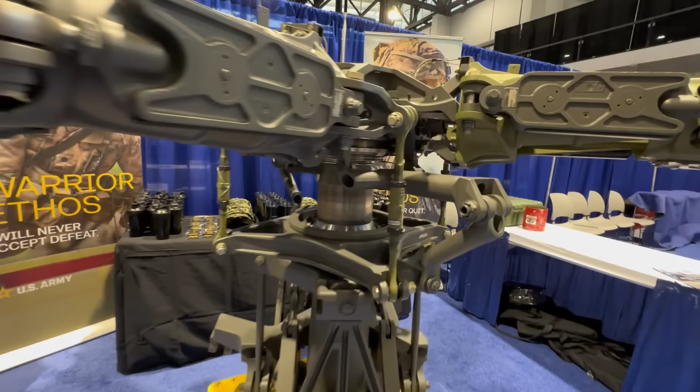First star of the show: the Helicopter Challenge. This event is presented by the United States Army, and this is called the Main Rotor Track and Balance Adjustment. The task simulates adjustment of the main rotor pitch change links of the helicopter main rotor track and balance. If I'm not mistaken, I believe this comes off of an Apache, so correct me if I'm wrong in the comments.

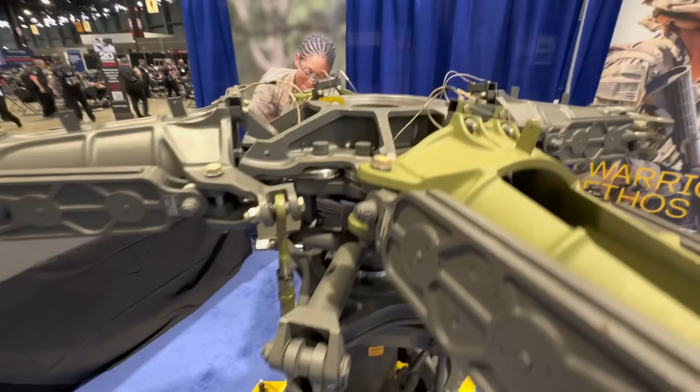Last time I actually worked on helicopters or any helicopter component was back in A&P school. Ever since then, I've never actually touched a helicopter in my career — I've always just done main jets. But I do still remember some small bits and pieces of information from my studies. Rotor track and balance is a process of smoothing vibration within the airframe, which are caused by the main rotor blades.

By adjusting the pitch of individual blades, you are able to cancel out that vibration throughout the helicopter fuselage, also giving a better performance to the blade's rotation.

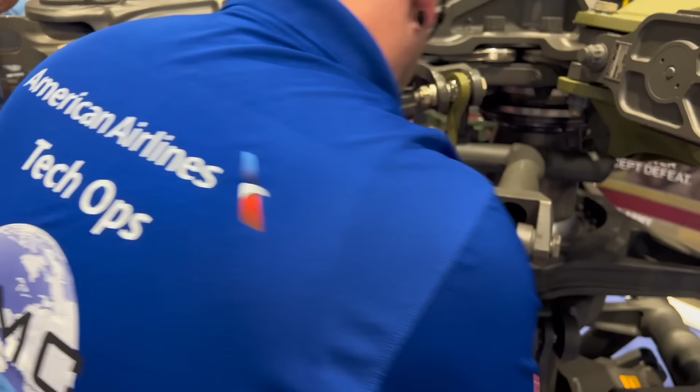Just to make mention, there are 27 events within this whole competition, and this is one of them. Some of them are individual events, as you can see one of my teammates performing this one, and some of them are more of a team combined event, such as more people involved, maybe 2 or 3.

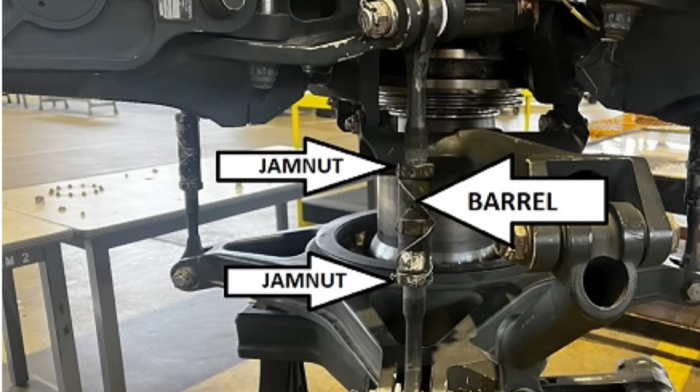My teammate is cutting away the lock wire, or safety wire, from the jam nuts in order to get them loosened to get the adjustment ready. As soon as he loosens the jam nuts, he can turn that center body, which is called the barrel. Depending on the type of adjustment needed, which is preconditioned and already told to us because there are manuals we are following, they will turn that barrel in a certain direction to get the certain adjustment they need. Once it's readjusted, it has to be re-safety wired, but this time by hand.

On a quick little side note, a big thank you to Charles, the big gentleman standing behind the man with the blue shirt. That man's name is Charles, and he was the judge in that competition and also a very good friend. He's actually an incredible individual. So if you see this, Charles, thank you, brother. You're incredible.

Engineers, technicians, students, ready, set, start.

You know, I just realized I have not broken down the actual series of events of the competition, so let me double back on myself and explain. The entirety of the event takes 4 days. Day number 1 is orientation. The next 2 days are the actual competition, and day number 4 is the award ceremony.

There are 27 events this year and 90 teams this year. Every team has 5 active members and 1 reserve, just in case somebody gets injured, you'll have a reserve personnel. Some of these events are individual events, meaning only 1 person performing the tasks, and some of them are team-based, such as 2 or 3 people.

Within the 2 days that the events are actually taking place, it is staggered out on a very particular time basis, so you have a break in between the events. But when the event is actually happening, everybody's participating, everybody's doing something. Each event gives you 15 minutes to accomplish the tasks.

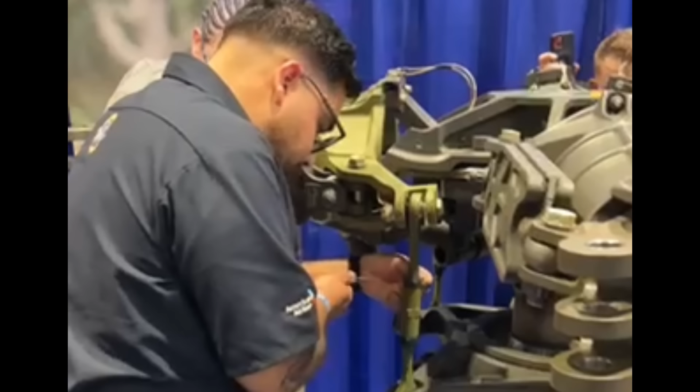Now, one thing I'm going to mention here is that this is a very unrealistic way of doing things. In the real world, nobody is taking liberties with time. Matter of fact, we do the complete opposite, we take our time. So to anybody watching, any future students or future aircraft technicians, this is not how to do it. This is a good example, a good understanding of how to interpret manuals, but speed is not the key here. But in the spirit of the competition, obviously this is how it's done. But my point here is that we don't go fast in the real world. You're going to hear me say that a lot during this video.

As you can see right here, this individual is safety wiring by hand. To make mention, that individual is actually part of the schools that we are sponsoring, West LA College, a phenomenal mechanic, and I can't wait to see them out in the field.

All right, on to the next event. This one is presented by United Airlines, and they brought out a portion of a 747 wing. This is a fuel tank entry event. The procedure is to defuel the aircraft wing, simulated obviously, and then deactivate the NGS system, the nitrogen generating system. Once that's completed through various switches and making sure proper lights come on, then you can take off the panel.

Same as before, rules apply. You have to follow the procedures, but you have to go as fast as possible. But once again, in the reality, in the real world, you're not doing this fast.

During these kind of events, communication is very important, especially between the two team members. One team member is reading instructions while the other performs the work, and it can also be vice versa.

After all the simulated safety precautions have been performed, now you can remove the panel.

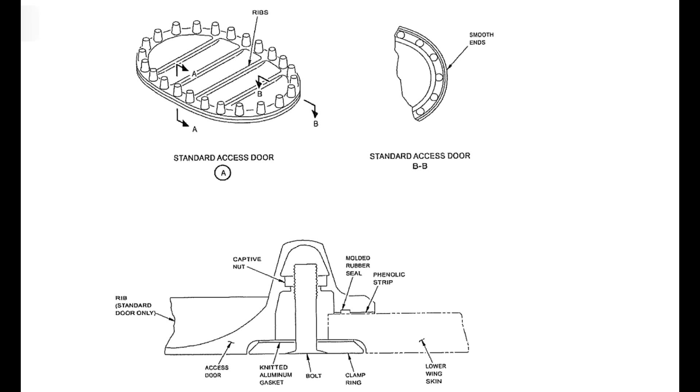Once all said and done, all tooling has to go back to its proper location. Yes, they will dock you points if you don't put the tools back in the proper location, or even if the torque wrench is not zeroed out. Very strict. Overall, very fun, but very laborious event.

On to the next one. This is really cool. This one was actually a brand new event, once again presented by United, and this was called Render Safe. This was a door slide change on a 767.

In order to perform this task, you have to really pay attention to the maintenance manual. There are a lot of safety precautions and lockouts just for this. I'm going to remind you again, in the real world, you do not do this fast. This task in the real world is actually very dangerous.

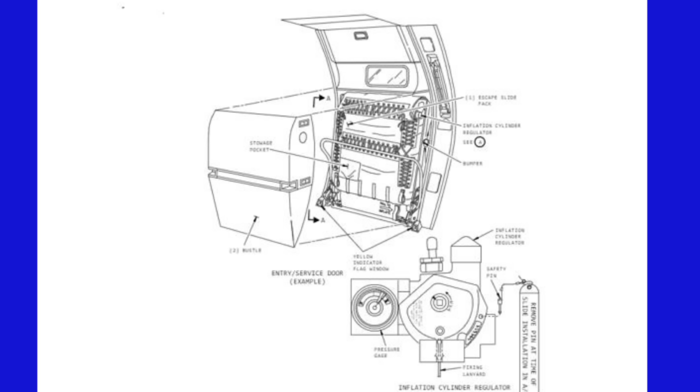One unique thing about the 767 door is that it doesn't swing out. It actually goes up into the fuselage. It's attached to a very massive spring that's in the overhead.

That's one of the lockout points, where you have to put a specific pin in there. Because when time comes for an emergency and the door is being deployed and the slide deployment is actually happening, that door goes up quick in a heartbeat.

The secondary point of security or safety is to actually pin the bottle, the actual bottle that inflates the slide itself, which is behind that bustle. Here's what the slide looks like behind the bustle.

The key component right there on the bottom is called the girt bar. That's what attaches the slide to the floor, and once that door moves up, the slide gets deployed because it gets pulled out. So as the door moves up, the slide stays in place and then unravels itself and gets inflated. You can see it right there.

The procedure here is, first of all, put out all the safety equipment, making sure that nobody operates the door from the inside or the outside. Second, make sure you're following the manual procedures, and then start locking out all those key components I was talking about earlier. This was a 3-person event.

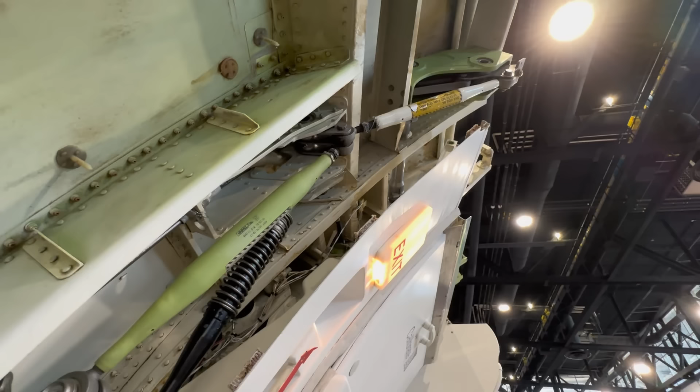One person was the inspector and two technicians were working. Communication and callbacks were imperative.

This is the upper roller guide, and this must be pinned before doing any kind of work. The slide comes with its own pin, and we must pin it right there, as you can see with a little yellow arrow.

This is a simulated event, so the bottle pressure is 0, but it's usually reading about 3,000 psi. This is why I said the job is actually very dangerous and has to go very slow. Inadvertent slide deployment can cause lots of damage and lots of injury.

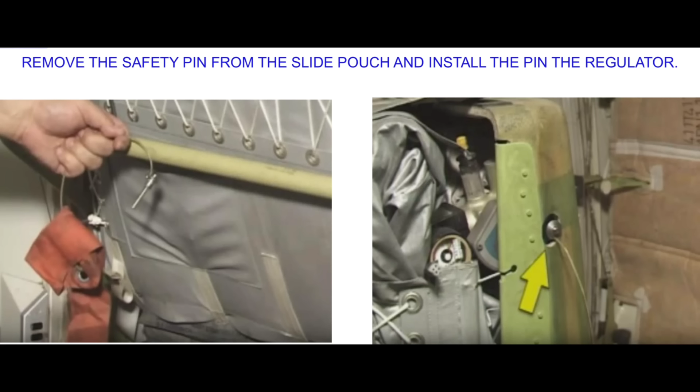Here's a wonderful example of the Baker students performing the duties. Once everything is properly disconnected, the slide kind of leans forward towards them, and then they simply replace it.

There are a bunch of steps that I'm leaving out of this one because it would take me another hour just to explain how to do this whole task, but I'm giving you the short version of this.

This was a very challenging event, and it was a brand new event, so it took us a minute to get used to it, but it was fun. We had a great time.

Okay, on to the next one. This is the click lock challenge. Click lock is a particular type of fastener, and it has a very special feature.

The feature is that it's self-locking. It no longer requires safety wire. As the fastener gets tightened to its proper location and comes down to its very last 2 turns, that's where the magic happens. The flexible beam fingers of the locking act against the detent cam. The mating part provides a prevailing torque which is sufficient to prevent any kind of loosening. Fancy way of saying it self-locks.

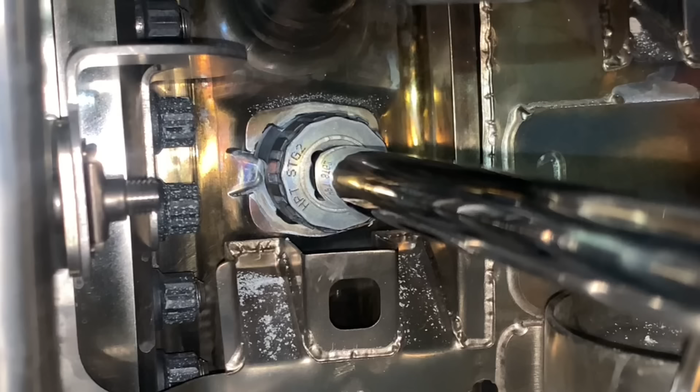It's the slogan of click lock, we won't back off. To loosen it, you just provide enough torque and it will loosen. But the technology is so advanced that vibration is not going to affect it.

There's a variety of fasteners that they have, and the majority of the time they're using it on fuel line couplings, borescope plugs, drain plugs, pylon locks, things of such. Now you ask yourself, how come they don't use this kind of technology all over the aircraft? Well, it's very expensive. So using traditional fasteners with safety wire, yeah, that's still being done. These type of fasteners are more reserved for very crucial components, the ones I mentioned earlier.

It's a comparison. First, you have to torque down the click lock, and then you have to do it conventionally. The point here is to see the difference. I would install the fastener on the left, which has the click lock, and then I would do the fastener on the right that has no click lock and have to safety wire it.

It's a way where the company can represent its product and show how efficient it is and much quicker. I'm sorry I didn't get a chance to capture the footage of it, but I hope you guys got the gist of this. Up next, the DMC challenge.

DMC is a tooling company, and they are a staple within aviation, especially when it comes down to avionics works. In this particular event, the technician was tasked with repairing and securing a wiring harness.

DMC put out a really great example video. It's on YouTube. You guys can go check this out. Here's just a couple of small clips of it.

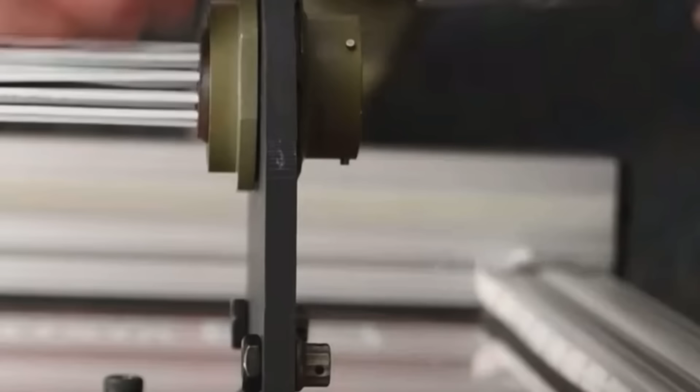Utilizing the special tooling provided, the technician can remove the wire from the cannon plug on both ends of the wire bundle.

Once that's done, any kind of FOD is discarded and you have to recreate a new wire. That means you have to repin it using, again, a special tool to crimp a new pin onto the wire.

The crimper itself has to be assembled because there are different settings on the crimper because of various amounts of gauge of wires and pins.

A new pin will be inserted, and so will the wire, and the crimping action takes place. Pretty simple. Avionics work is actually pretty fascinating when it comes to aviation. Lots of new technologies out there, and I highly encourage anybody that is up and coming into this field to learn more about it.

Once the new wire is assembled, now it gets reinserted using another specialized tool. A quick little tension check to make sure the pin is well seated within the cannon plug.

And onto the lacing of the wiring bundle itself. Now, DMC has produced a new tool called Lace Lock. This eliminates the traditional way of lacing up wiring bundles as well as zip ties, makes for a quicker and more cleaner look, as well as it's more secure.

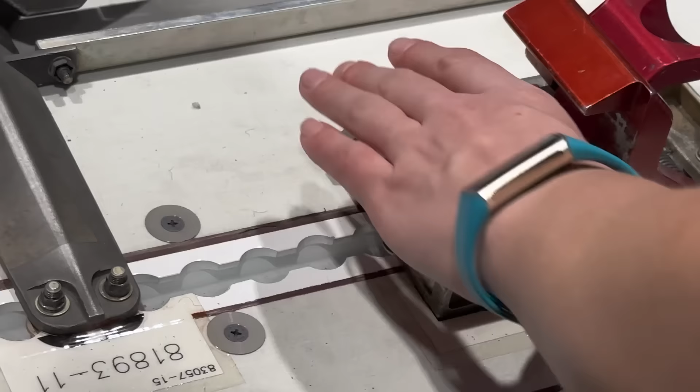This was represented by FedEx, and this was a cargo floor lock. These are the locks that hold down pallets within aircraft cargo holds. The task at hand is to remove, disassemble, inspect, repair, and reassemble.

Looks easy, sounds easy, but trust me, this was not an easy task. Check out the minute components that are within it and the articulation of these clips. It is very difficult to do this.

If not handled with proper care, it turns into a finger mousetrap, basically. It'll snap your fingers off really quick. Removing those cotter keys, sliding that unit out, making sure that springs are intact, and putting it all back together within a timely manner, which is within 15 minutes.

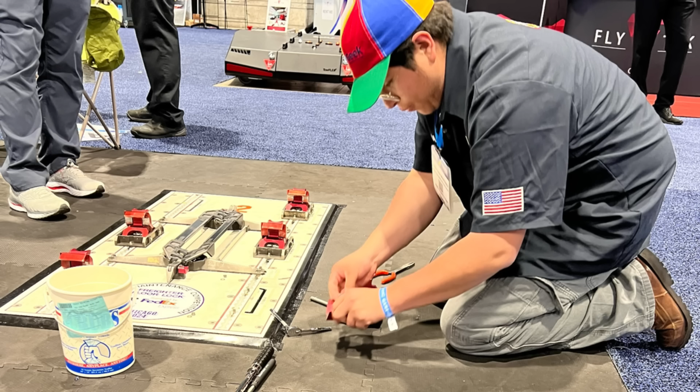And trust me, people were doing this very quickly. Keep in mind, the judges are watching, so if any components are lost or misplaced, like a washer or a cotter key, yeah, docking points. So once again, very fun, very challenging.

Now, what you're looking at here is an APU, Auxiliary Power Unit, but it comes off of a very particular aircraft. This is the APU of an MD-80. The task at hand is to remove and replace the starter, that little black component I'm zooming into, removing the electrical leads as well as the nut and washers for each and the O-ring within it.

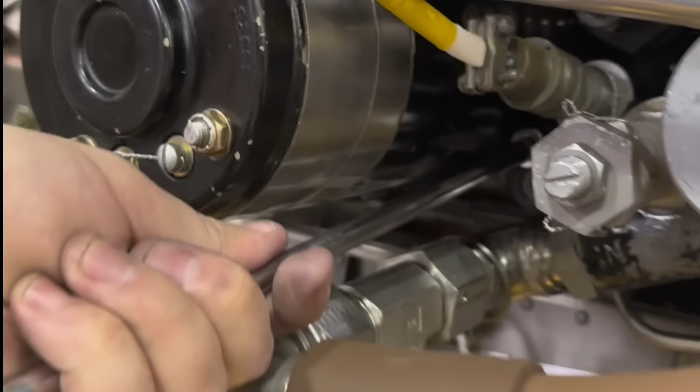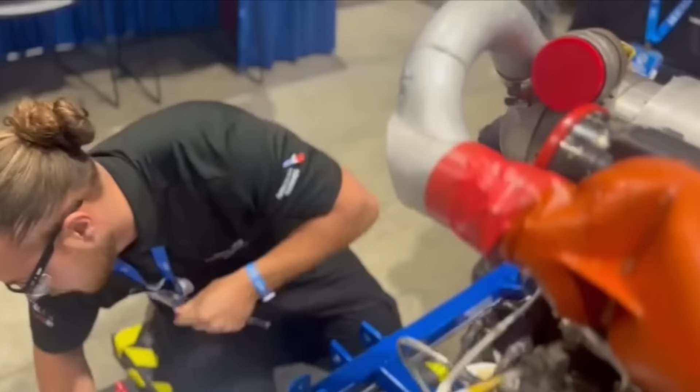Pay particular attention to how little space there is to work in there. This is an APU that is outside of the aircraft, but in the real world, imagine this being on the aircraft, even less space. The key here is to move very efficiently and not lose any of the hardware, as well as not strip or damage any of the components. Proper use of tooling is very important. Remember, tools are the extension of a technician. Skills like this come over time and through experience.

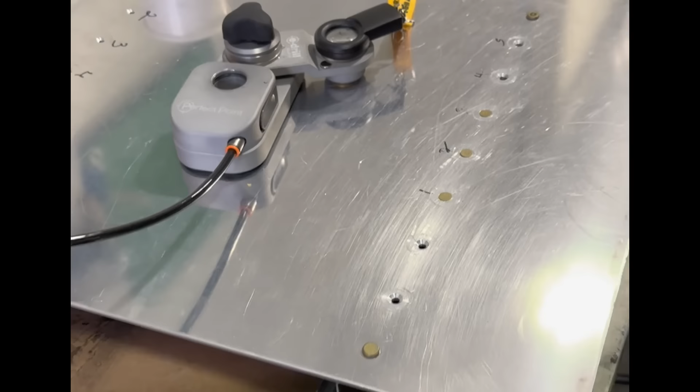Now here's a really fun event. This is called Perfect Point E-Drill Fastener Removal. To anyone that's been in the industry, especially an airframe technician, you would really appreciate this. This particular tool is designed for ease of use to remove any type of fastener, to be more specific, titanium fasteners. Let me show you how this works, it's really fun. This is Perfect Point, an electronic drill. It's pretty awesome, check this out.

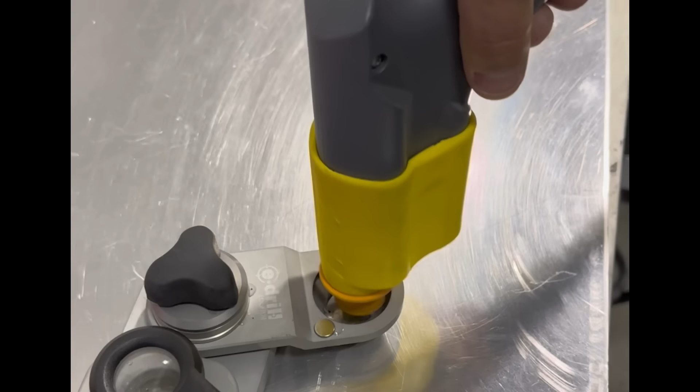Got our fasteners. Drop this down, and there's a little sight in here where you can see the fastener head. Check it out, see the fastener head? Now that's perfectly aligned. Let's take that out. Put this on, just press and squeeze, and it starts cutting automatically using electricity, and it has some water in there as a conductor. Take that out, cuts perfectly through the shank. And all you have to do is grab your punch, pneumatic punch. Perfect every single time. This is meant for titanium rivets or fasteners, so it works.

In previous years, they had the mock-up as a wing, where you're removing fasteners off of a wing. But this year, they did something really special. They brought two inlet cowlings to simulate a real-world environment. And here's one of the West LA students right here performing the task.

Right on, just like that.

The key to this one is to make sure to get all the cuts correctly, and then afterwards follow through and punch out the cut rivets.

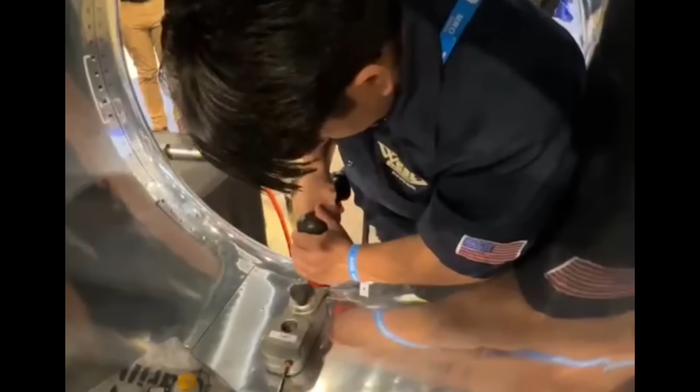Doing great, keep it up. There you go, pull the head off there, yep. Hold on, make sure you're seated, make sure you're seated. Give me a hand, there it is. There you go, all right. Come on, three more, you got this. There it is, good, yeah. Keep it up, nicely done, keep it up. There you go. One more, one and done. So you're fine to bend, so you're done. Don't worry about that one. Trey, don't worry about it. Good, throw it in there.

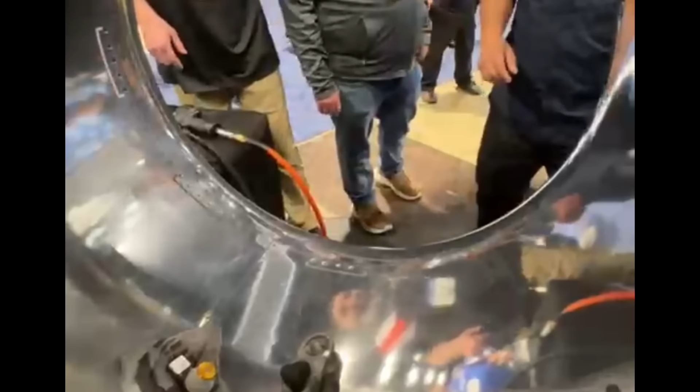As you can see, the judges are very encouraging and supportive of the students and everybody there. On to the next challenge.

This was a really interesting one. This is for dent mapping by a company named 8 Tree, as well as Alaska. The task at hand here is to perform a damage inspection and map the dents. This requires a keen eye, attention to detail, and knowing how to understand depth gauges and 6-inch scales, as well as basic arithmetic to calculate the actual damage.

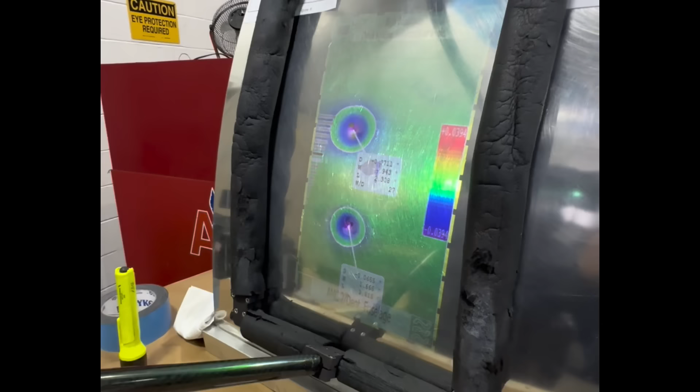Now, once it's done manually, then you actually get to use the very cool tool they have. Here it is, automatically measuring the dents. Pretty cool, huh? So the tool in question actually uses augmented reality to map the dents itself, any kind of bumps or surface defects. Why is this such an incredible tool? Well, because it eliminates human error. Nowadays, machines are so sophisticated that they surpass just human capacity to inspect such things. So it's a great thing to have.

On to the next event. This was presented by Eastern Florida State College, and this is a very unique event. What this is simulating is actually communication. The task is fairly simple, you're transferring fluid from one apparatus into another. The key component of this one is pure communication between the teammates.

The simulation goes like this: the person wearing all that PPE, the protective equipment, is simulated to be in space. The person speaking is on Earth or some other body or planet, whatever, you get my point. The whole key to this is proper communication and readback. So whatever the person next to them is reading, the other person in the PPE has to respond, read back, and perform the action.

If everything is done correctly, the proper amount of fluid from one apparatus will flow into the other. Assembly and disassembly of the apparatus has to be done as well. So everything is about attention to detail and following instructions to the T. Once again, the judges are monitoring all of this to make sure no mistakes are occurring. If there is a mistake, then you get docked points. But there's also a chance for bonuses for proper command and responses, as well as proper transfer of fluid to the exact number.

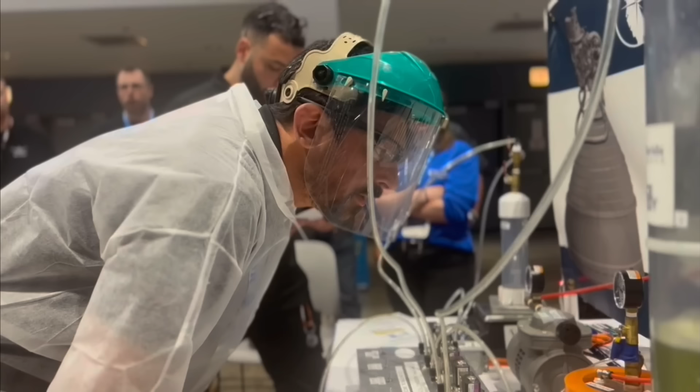Adjust and verify compressor and air regulator set to 25 psi plus or minus 5. Open MB3. Open MB1. Open S4, 5, 6, 7, 8, take a picture again, 9. Close fly valve. Close fly valve. Close vent valve. Close MB1. Reduce compressor. I'll take my picture. Close MB3. Open MB2. Open MB1. Close all valves. Turn off power to the control box. Verify power to vacuum pump and control box off. Verify all valves closed. Disconnect all hoses.

As you can see, it's kind of a stressful environment, especially when you're in an auditorium with lots of noise going around. So getting proper communication across to your teammate is very important. There you go, on to the next one.

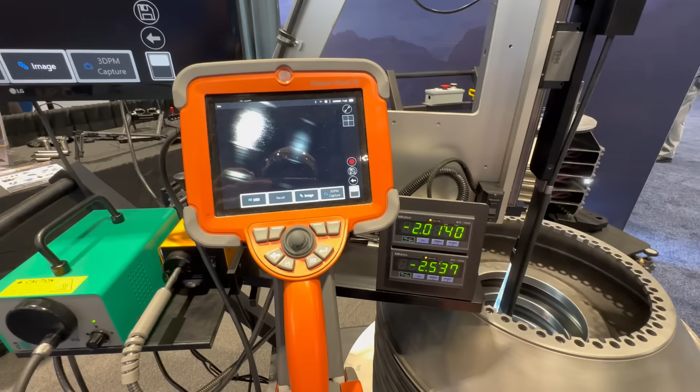This, for example, is a borescope tool. This is something that we would use to look inside of the engine, places that are not accessible to the hand or any kind of human eye.

A variety of tooling manufacturers as well, and what was so cool about them, they were actually doing giveaways. So the students that were participating and walking around on break checking out the MRO had a chance to win either a full set of tools or a whole toolbox. It's pretty fun.

Since the convention is MRO, which is maintenance, repair, and overhaul, you also have the manufacturers or the overhaul facilities that basically refurbish all kinds of parts. That what you're seeing there is an LPT shaft, that's one of the shafts that run along the inside of the engine that spin the blades.

Everything from interior to exterior, any kind of component that you can imagine is there. Even simple faucets.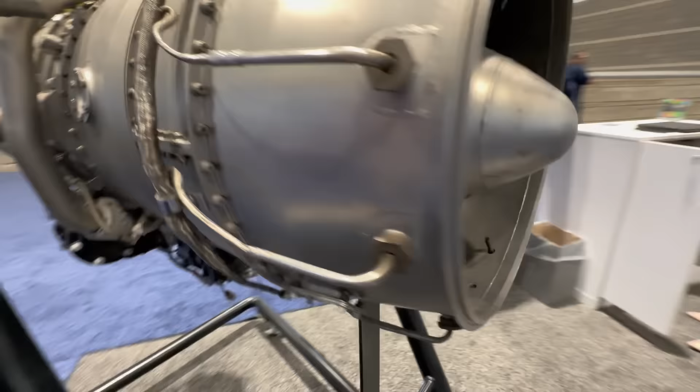It's fun for us as technicians because we can relate to all these products because we work on all these products. Seeing components like a tire off the rim assembly or looking at a shaft that's buried within an engine that we might never ever see. So for us, it's fascinating.

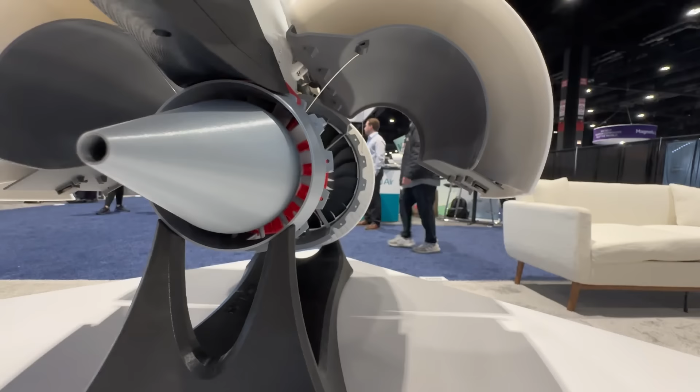And they had a bunch of these cool little mock-ups. I think these are 3D printed engines, but man, these are really, really cool. If you ever get a chance to go to one of these MROs, I highly recommend it. It's basically like Disneyland for anybody that's aviation related or an enthusiast, anything. It's always fun.

Scouting out the plugs. Yeah. Well, they're going to be changing it here pretty soon. How are you? How are you?

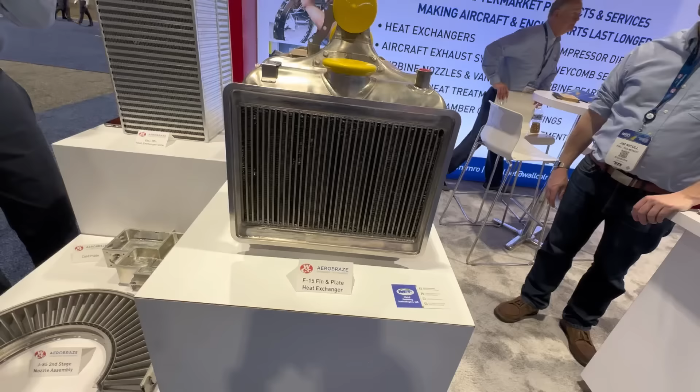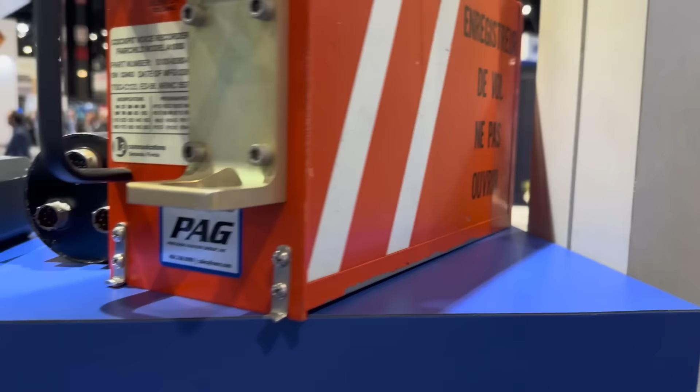One other thing I really enjoy about this is stopping and talking to most of these vendors because these people are not directly next to the aircraft. They don't work with the aircraft as we do. So when we share our experience as technicians and take a look at a component and say, hey, I've changed that before, I work on this, they're fascinated by it. They want to learn more. They want to know the reliability of the product, is it working out well for them. So it's always fun and a good experience to talk to these kind of people because they have knowledge behind the scenes of the manufacturing process, the overhaul process. It's very, very interesting to see this, and you get to meet a lot of good people, lots of smart people.

This is awesome. They did a really good job on this.

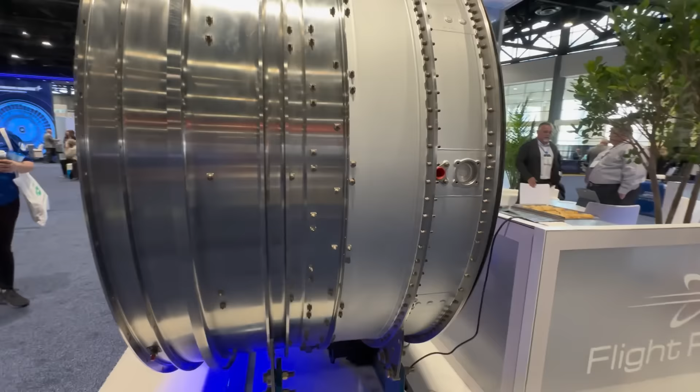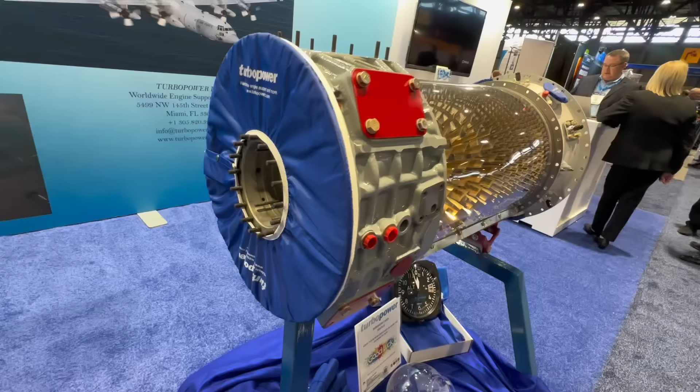Beautiful. Yeah, but it's a huge purchase. There's some beautiful compressor blades right there. Woo, it's clean.

We had a quick little stop at GE Aerospace and said hi to some of our friends over there, and I always love seeing this. They bring out this beautiful blade. This comes off of a GE 9X. This is their biggest engine right now, and I would love to have this thing at home. That thing is a work of art.

Anyway, back to the competition, I should say. That's it, the break was over. Let's go back for some more events. Should be fun.

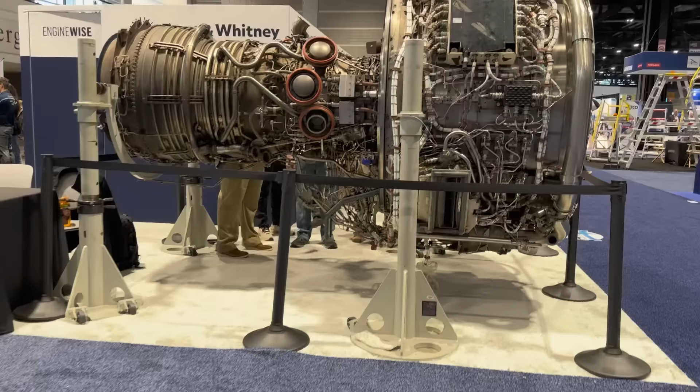Here's the granddaddy of them all, the V2500. Last year, actually, I did this: removed and replaced a 10th stage solenoid and did an ops check. But this year, I'm going to be doing a fuel nozzle.

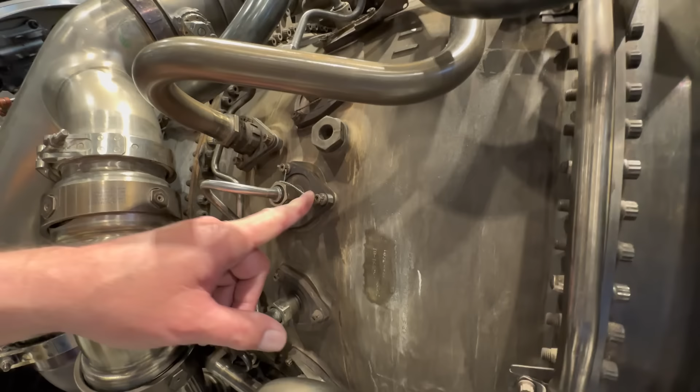16 and 17, or just this one? Oh, just that one? Yes. Well, you do have to re-safety that as well, right? Because you're breaking torque on this as well. Just doing the one fuel nozzle. First shift has both fuel lines.

So Pratt & Whitney brings out 2 engines to this competition. One is the V2500, which I'm going to be working on, and then the other one is the Pratt & Whitney 1100. They stagger the teams with numbers, so my team number was 62, an even number, so all the even numbers worked on the V2500 and all the odd number teams worked on this one. But for some strange reason, they counted it still as one event. Anyway, the task was to change out a fuel nozzle, which you'll see here shortly. As a side note, I have zero information or knowledge on this engine because we don't have them in our fleet — ours are all CFM LEAP 1As. Still a beautiful engine though, very gorgeous.

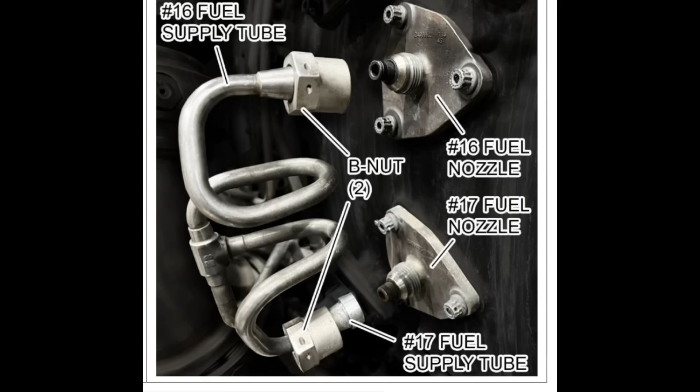And here we go, let's see if I can do this. Shake off the nerves and hit it hard. Removal and replacement of a fuel nozzle. First thing I do is break the safety wire, after which I have to break the torque on the B-nuts on the fuel manifold — there's 2 of them. The way the fuel nozzles on the V2500 engines are, the fuel nozzles and the manifold are interconnected, so in order to change out one fuel nozzle, you have to break torque on 2 of them because of the way the fuel supply line is interconnected. Here you go, this is what it looks like when the B-nuts are removed and the fuel manifold is kind of pushed back.

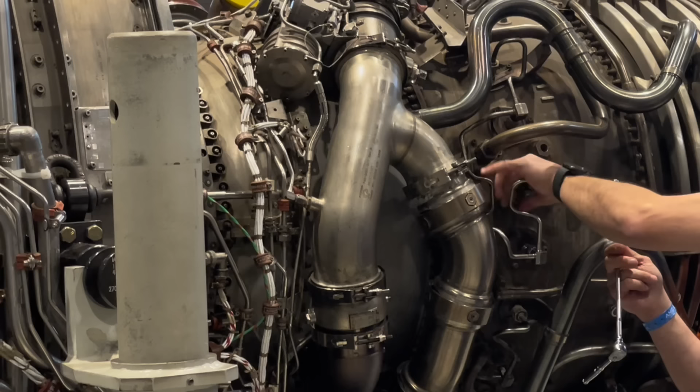Once the B-nuts are loose and the fuel manifold is slightly pushed to the side, I get to work on the fuel nozzle itself. It takes 3 fasteners or 3 bolts that hold it on. There's also a gasket inside there, I'll show you in a second.

I'm moving as fast as humanly possible, and you got to be careful. There's a lot of sharp edges there. Matter of fact, I even cut myself doing this. It was me pulling out the fuel nozzle, and this is what it looks like right here. And there's the gasket I have to replace.

Confirmation from the judge, as well as getting the torque settings all proper and showing them. Now it's time to reinstall.

Coming down to the final end over here and performing the torquing process of the B-nuts, and this is where I kind of messed up. I should have used an extension with that crow's foot, but it is what it is. It cost me a little bit of time. This is why I said this kind of job is not meant to be done in a hurry. When you're in a hurry and you do this kind of things, mistakes occur. This is my whole point.

Unrealistic. Anyway, this is the final product. This is what it should look like. And that's exactly what it did look like when I was done with it. Now, I actually got docked a point because I did not properly place one of the crow's feet correctly into the shadow box, it was slightly off center.

So yeah, the judges are very strict when it comes down to this. Any kind of FOD, any kind of tools misplaced, and even if it's not correctly set into the shadow box, you'll get docked points. But it is what it is. It was a fun event. I loved it. I think I did fairly well on it. But hopefully next year we'll win that one.

On to the next event, the PPG. Another really fun one. There's a couple of parts to this one. It's kind of a 3-part series when it comes to the PPG. One is called Transparencies, it's a 2-parter. One is a removal and replacement of a window plug. And the other one on the same fuselage right there, or the flight deck, as you can see, is a recoating of the windshield. You have to basically reapply the hydrophobic coating.

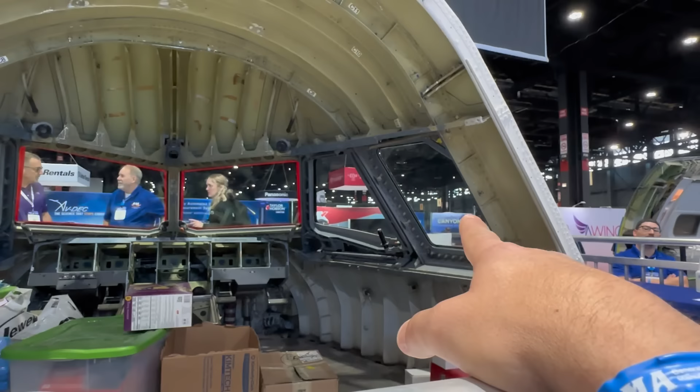Just to make mention, this is an Airbus 320 family flight deck right there you're seeing. A small window on the side is what we're changing, and I've changed a million of those in my career, so it's fairly easy. Captured as much as I can, but there you go.

The window plug is already off. I'll show you guys some more footage of the students that were performing the work right there as well. This is the Baker students right there. The window, for time purposes, is only held down by 6 fasteners, and then once that plug is removed, there is an inner seal that needs to be removed. They're attached by Hi-Lok fasteners right there.

At the same time, the other person is now resealing the window, cleaning it up and resealing it. There's a whole procedure for this. Back to the plug: as soon as you remove those Hi-Lok fasteners, there's 6 of them, you take off that gasket, clean it off, and put it right back on. Retighten those Hi-Lok fasteners and then use a suction cup to grab the window itself and place it back onto the fuselage.

In the real world, obviously there's more fasteners and everything is going to require a torque value. But this one, just because for time purposes, no torque was required. They just wanted us to remove it and install it as quick as possible. Remember, not reality, just a simulation.

What you see my partner doing there is shaking up the compound in order to reseal the window. There's particular chemicals inside those, so as soon as they get mixed up, in a timely manner, I believe it's 2 minutes that you have to shake it up. Once that's done, it's reapplied to the windshield.

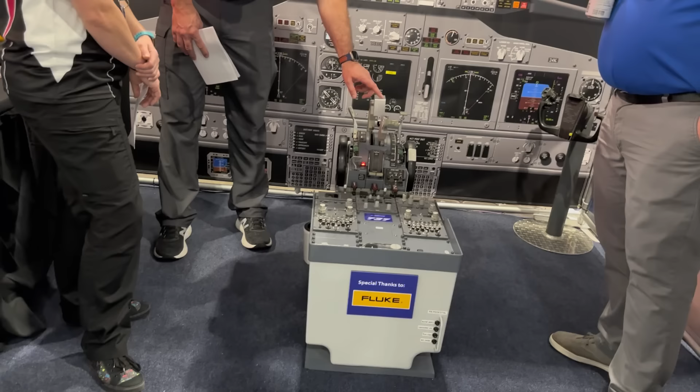This one is a brand new event presented by Boeing and Southwest. This was a troubleshooting procedure on a thrust reverser of a 737. The task needed to be performed was to deactivate certain systems as well as use a multimeter to test the leads, making sure you're getting some sort of continuity or resistance. This is done within the pedestal.

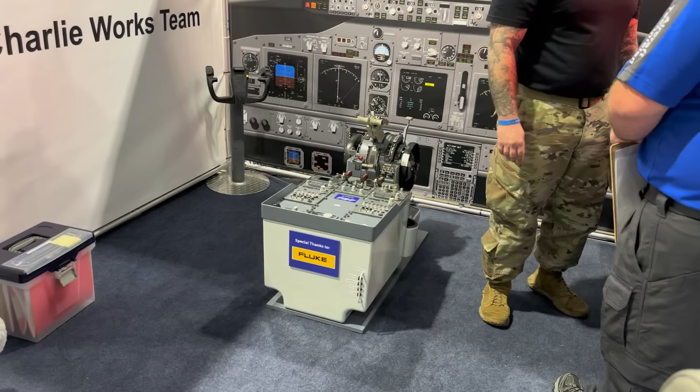But along with the switch pack, there's also a small switch within that thrust column, which I'll show you in a second, that fails. It's not a hard thing to change and it's very easy to troubleshoot. But this is why in the real world we have FIMs, fault isolation manuals, and proper procedures to find these issues. There's that little control switch I was talking about - it's right underneath the control switch spring. Here's what it looks like on a real airplane, so you can observe the details a lot better.

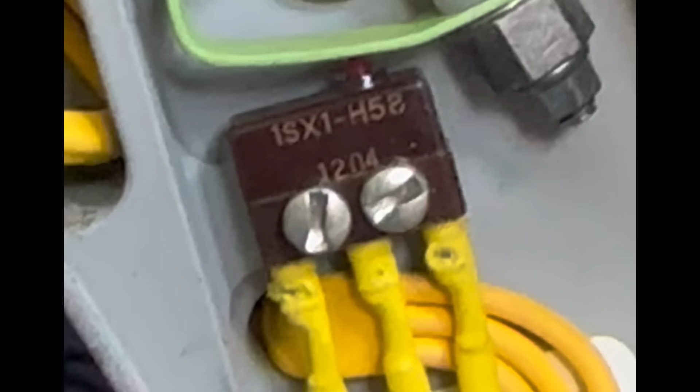Once the troubleshooting procedure is completed, they use a protractor attached to the thrust reverser handle, and go through the angles of the thrust reverser handle motion, making sure it's engaging with the switch. Once again, this was a new event, and it was very interesting. On to the next event, and actually this is one of the real fun events.

This is a blade removal on a Garrett TFE 731 engine. The task here is to remove the damaged blade. The simulation is, let's say the engine had a bird strike and you have a bent blade. The judges basically tell you which blade you have to remove, but there's a very particular sequence on how you can remove these blades. It's not like any other engine.

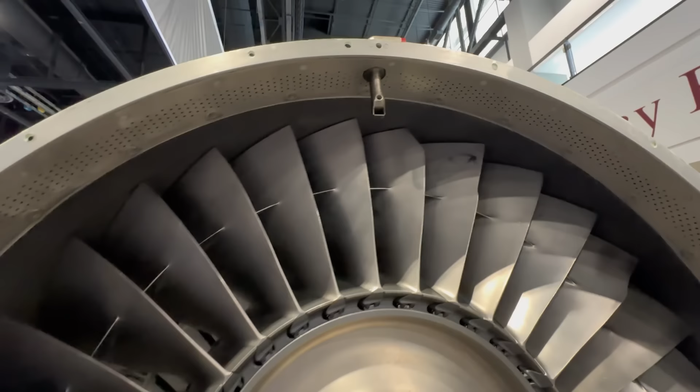The process is that all the blades have to come out at least 1.5 inches in order to get the damaged blade removed. You slowly have to shimmy them out at around the 3 o'clock position, but where the blade actually comes out is at the 12 o'clock position. So as one team member is spinning the engine, the other team member is slowly shimmying them out.

This event and this engine takes a lot of finesse. You have to be gentle with it. If you start manhandling it, all those blades seize up and you'll never get anything out.

For some reason, either I lost the footage or I couldn't find any, but this is from last year - this is me and my partner doing it. This year, it was a different person doing it. But as you can see, I'm trying to shimmy them out at least 1 to 1.5 inches, and then I can finally get it out from the 12 o'clock position. And trust me, the clock is running, so you're trying to go as fast as possible.

Now, the interesting part - getting it out, believe it or not, is not the most difficult part. The most difficult part is getting it back in, but that's a bonus. If you can get the blade back in, they give you a massive bonus. But there are also little retainer clips inside. If you are inserting that blade back in, those clips love to fall into the engine, and it's a pain to get them back out.

You see what I just did there? Actually, the wrong blade came out, so we had to keep on working. Yeah, this one, it's fun. It's a fun event, especially if you've never worked on this type of engine. Obviously, I haven't worked on these types of engines, but it's a good learning experience.

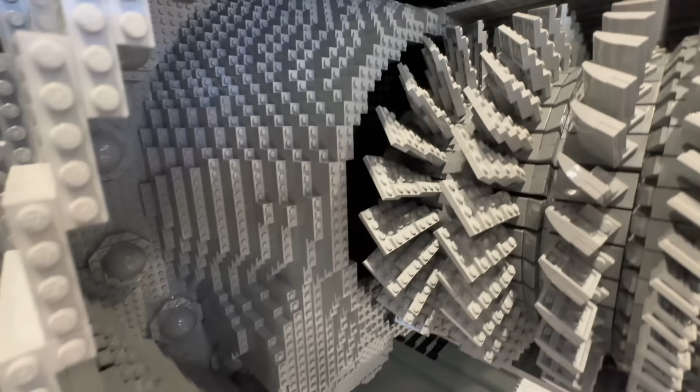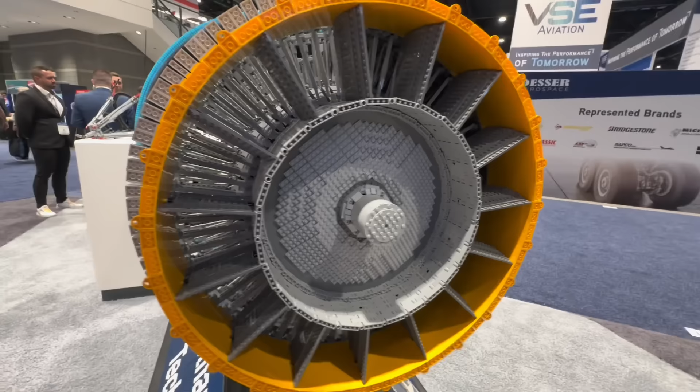The level of detail they put into this thing is just wow. That's all I could say. Just wow. And in fact, they brought this last year as well. I got some footage of that. I posted it not too long ago. Well, last year, obviously. But I made the mistake of saying leg-goes instead of leg-go. Oh my goodness, I got some flack for that.

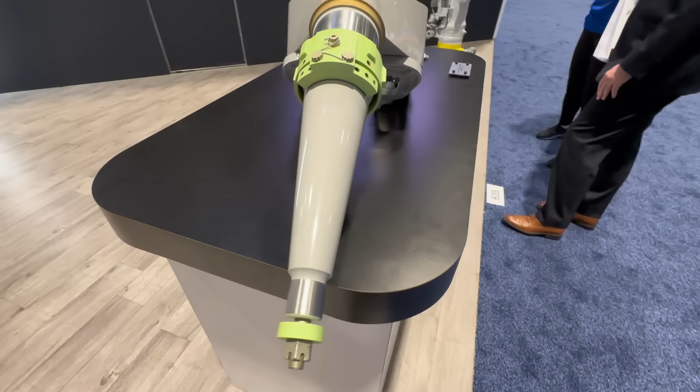A variety of vendors, as you can see right there, that reproduce and overhaul most of these components. That earlier one was a main landing gear strut from a 737, and I believe this is a flap track assembly from a 747, or a flap carriage, I should say.

This is always cool to see. This is an aft engine mount off of a CFM 56.

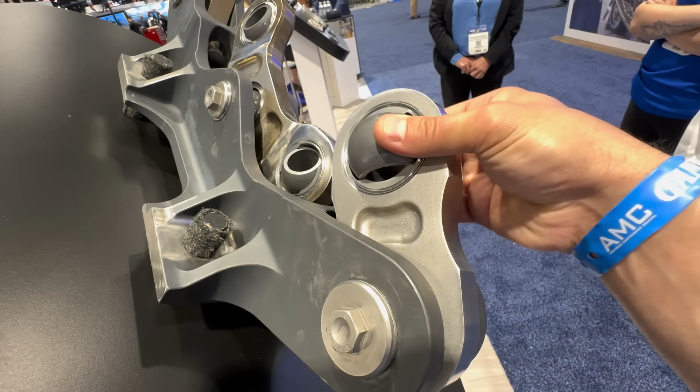But you are right, the way this is designed, it's a genius idea. Thank you so much for letting us play with it. You're so welcome.

As we're walking by, I noticed a particular component that I changed a lot as well. This is an igniter right here, made by Champion. I found it fascinating how they did a cutaway so you can see the innards. The big cable you're seeing beside it, that is the lead that goes from the exciter box and sends electricity to the igniter. An incredible amount of voltage is passed through those things, so that's why you see it so well insulated.

Okay, back to the events. This is called Antenna Gasket Installation Test. The task required is to remove and reinstall this antenna. Once reinstalling this antenna, it has to be done in the correct way. We have to install a proper gasket and a conductive polyurethane seal. But there's also another step, a bonding check. You have to make sure the resistance between the antenna and the base plate within the aircraft skin is at certain ohms.

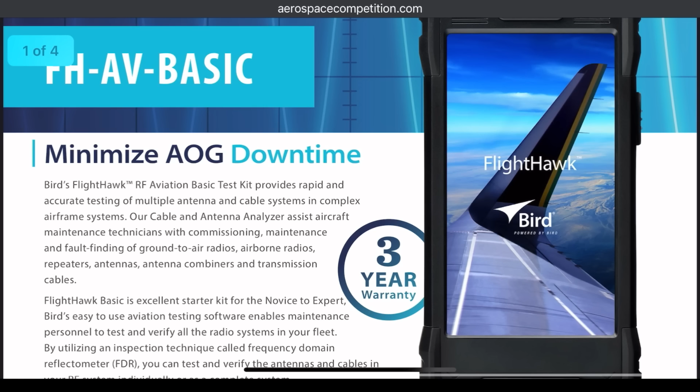This event is called the Coaxial Cable and Antenna System Inspection with Frequency Domain Reflectometer. It uses this specialized tool called a FlightHawk, attached to a coaxial cable or antenna. It can trace precision, loss, and return of frequency, and also measures the distance of where the loss is happening, a voltage standing wave ratio, cable loss, and distance to fault. In simpler terms, it pinpoints exactly where the issue is happening within that cable.

The unit is pre-programmed, so the task is to attach it to a length of coaxial cable which has breaks in between. Let's say you have a cable about 50 feet long, with breaks at 10 feet, 30 feet, and another 10 feet. Within one of those sections, there might be a fault, and this unit can detect it.

Once the competitor finds where the fault is, they can proceed to replace that particular cable. Once replaced, you redo the test and make sure there are no more faults. That's about it. Next event.

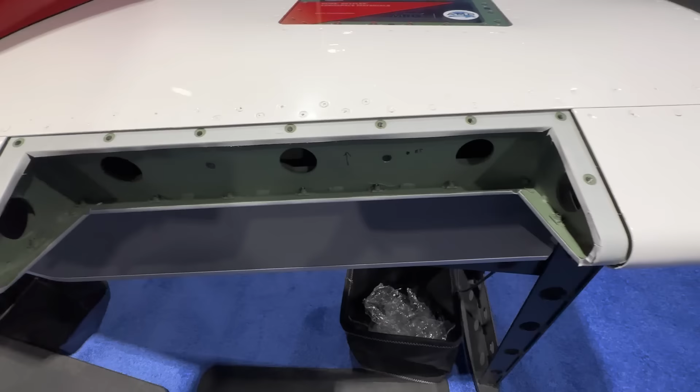This one is presented by Gore, called D-Nose Leading Edge Sealant. It's pretty simple. There's a removed leading edge component, a panel, and underneath where the fasteners go in, there is sealant - a very particular special type this manufacturer makes.

No longer do you have to mix up a compound and goop it on there. Now it looks like a strip of tape. You simply stretch it out, cut it to the right size, and lay it on top. Reinstall the leading edge nose panel and torque down the screws.

Compared to the old ways of doing things, this is much nicer and much cleaner. On top of that, you don't have to wait for curing time of the sealant. Once applied, it automatically adheres and just sticks and works. Overall, a very good product.

5, 4, 3, 2. 1 minute to the start of the next stage.

Overall, it was a very enjoyable event, one of my favorites. Also, the Wall Street Journal did an incredible article on the aerospace maintenance competition, mentioning it as the Olympics of aircraft maintenance, with viewpoints from many incredible technicians. I highly recommend you guys go read it, it's pretty awesome.

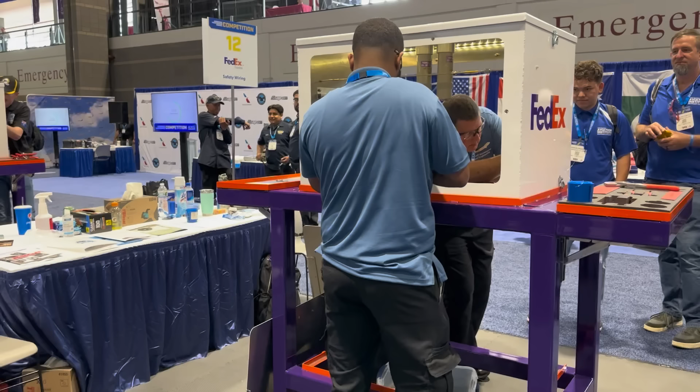Up next, the safety wire box presented by FedEx. This is quite challenging - we lovingly named it the blood box because you are not walking away without bleeding all over this thing. Safety wire cuts, and it cuts deep. I should probably say it pokes more than cuts. It's a gauntlet of challenges, from cannon plugs to U-bolts to turnbuckles and joints.

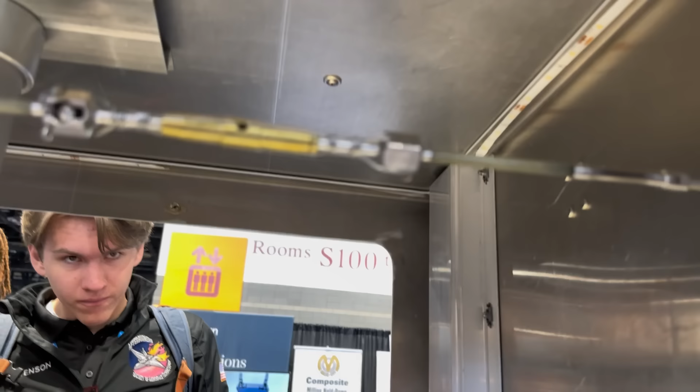We are following AC 43.13, the guidelines on how to properly safety wire things. Only you have to do it properly, and you have to do it fast. This is one of those skills that needs to be learned in school, and if you can take away anything from school, definitely learn how to safety wire properly.

Initially, the box itself is sealed up and closed. We have to open it back up, and it's a two-person event - 13 challenges within this box. Cannon plugs have to be installed correctly, because if installed incorrectly, the light within the box will not come on. Each of us works on our respective side, but we're also communicating in case one of us misses something.

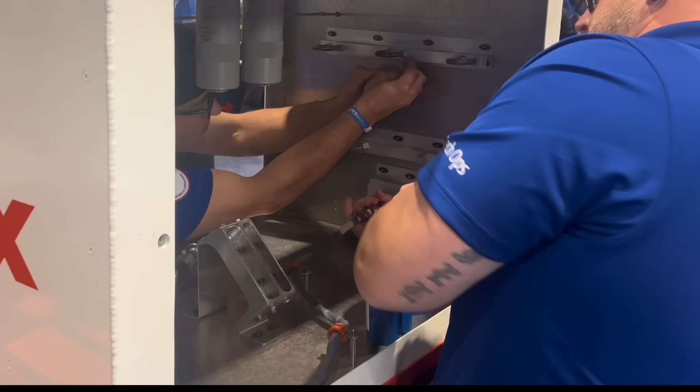Great shot of our West LA College team. They're doing incredible - that little light switch I was telling you about.

Just to mention, all tooling is provided by the presenter of the event, using .032 and .020 safety wire. The smaller gauge wire is more reserved for the cannon plugs, and the rest is the higher gauge.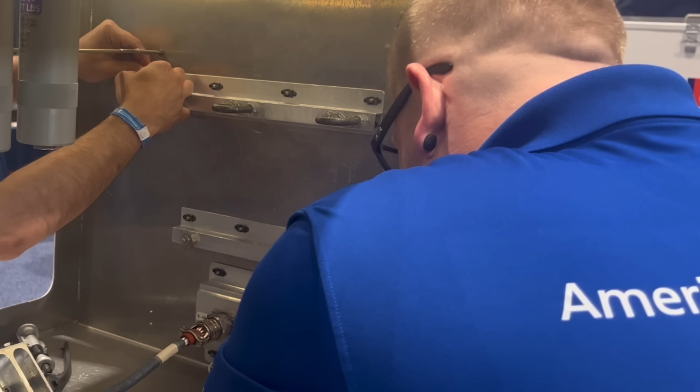I was going to put the original audio so you guys can hear all the clinking and clanking with all the safety wire, but then I realized, yeah, it's not going to be PG-13 style because lots of adult words are being said.

The frustration starts building up when wires start poking you and not going in the direction you want. But it's still fun because me and my partner are talking, we started humming songs to each other. It's quite comical - I think at one point I started singing Highway to the Danger Zone or something like that.

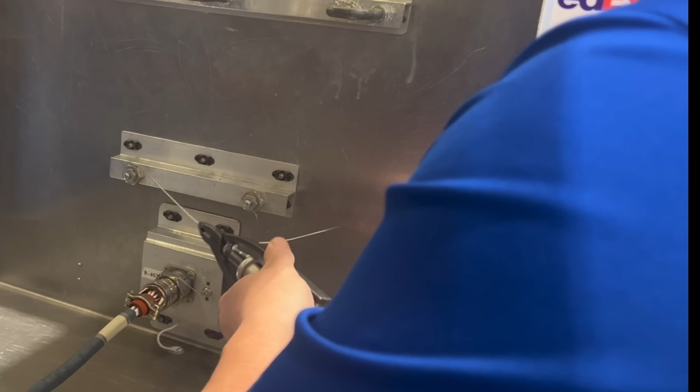One of the most important rules within safety wire is the twists per inch. This one I want you to remember if you're going to school: 6 to 8 twists per inch. Anything less than that does not suffice, and anything more than that, now you're work hardening the wire itself. So remember, 6 to 8 twists per inch.

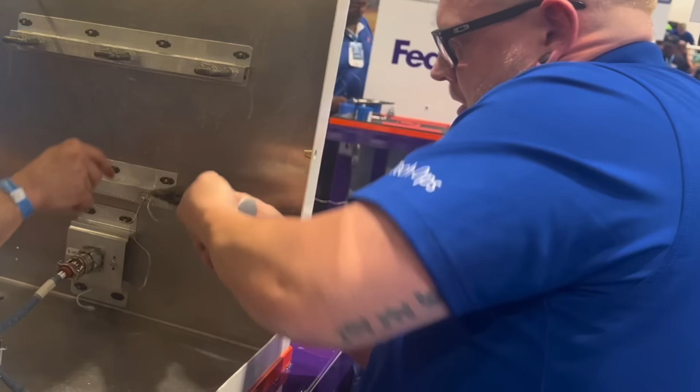I was actually very happy with this event. We got it done in a timely manner, and we even got to finish some of the bonuses, so we got some extra points. But unfortunately, we didn't win this one. This is a good reminder for myself - note to myself, make a safety wire video, which I will, I promise.

Okay, that's enough about the blood box. Let's go on to the next event, which is presented by the Royal Canadian Air Force, and this is a hose assembly. This would be simulating how you would basically assemble a hose from scratch. That means you have to measure it, cut it, and insert the specific fittings in proper ways. Now, to make mention, this is not really done in the real world because most hoses already come pre-assembled with fittings attached. This is more reserved for, let's say, a field repair where you don't have the fittings, so you have to assemble your own hose. Apparently the Air Force still does this, but you won't find this in airlines anywhere.

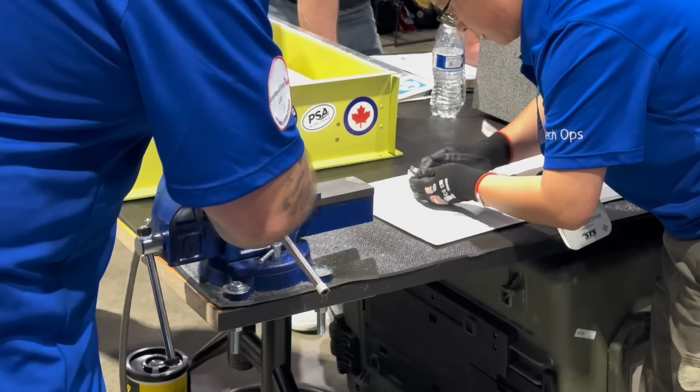Hell yeah! Ryan, can I switch?

Don't forget to peel the tape. Yeah, I know. I have more issues right now.

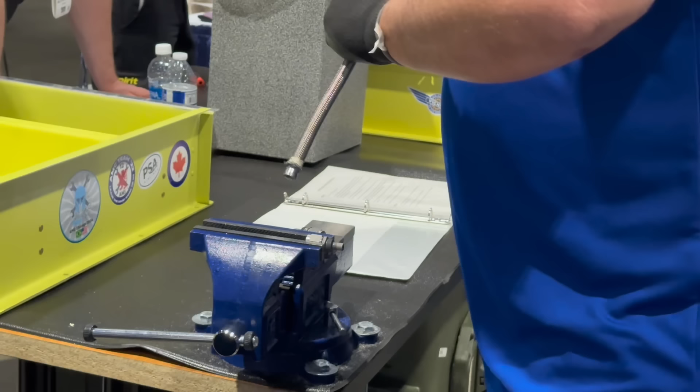The total length of the hose has to be 11.5 inches. That means you have to cut the actual hose to 10 inches because the fittings make up for the rest. Once everything is assembled, that yellow box right by it is where you're going to be installing it and torquing it properly. You also have to use feeler gauges, making sure that the gap between the fittings is proper. Once all said and done, everything needs to be put away, no FOD is allowed, and all the tooling has to be in its proper place. Or unless you don't, you get docked points. Very strict.

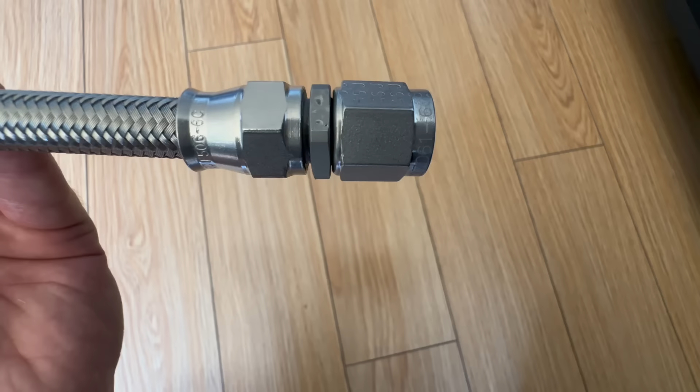It was getting very crowded, so I didn't get a chance to get the footage of them installing it into the box, but I want to show you a completed hose. This is the final product, this is what it should look like. Matter of fact, this is the actual hose that they assembled, because the judges give it to you as a consolation prize for completing that challenge. But yeah, that's what it's supposed to look like.

Oh, a fun little fact for you. See those little fittings? Those things are expensive as heck. I think it's a 3-piece fitting, and each one of those parts costs like $90 to $100. So yeah, that's pretty expensive right there.

Up next, another troubleshooting event. This time it's a logo light harness troubleshooting. The task required here is to remove those cannon plugs and remove that harness, and then you have to ring the wires. Ringing wires means basically you're using a multimeter and making sure you have proper continuity and there's no faults within those wires. Now, the interesting part is that there's little tricks inside - there's little faults and diodes that are hidden inside those bundles, the possibility of having an open circuit or short, or maybe the insulation is incorrect. This is why I say learning how to use a multimeter in a correct fashion and knowing how to read it is very important.

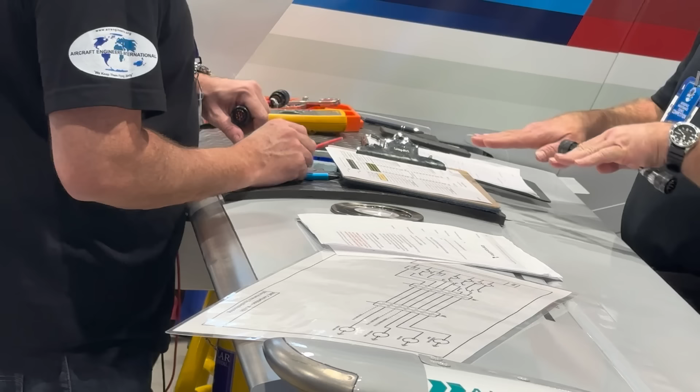Once you collect the readings from the multimeter, you have to document everything. And on top of that, you're following a wiring diagram, as you can see right here. Slowly, any kind of malfunction within the wiring bundle or the harness starts revealing itself.

That's about it, ladies and gentlemen. We finally come to the end of the events. And this is the man that it's all about - Charles Taylor, the first aircraft maintenance technician. Why do we do this? It is in order to honor this man and his legacy. Very few people know about this man. It will highlight the Wright brothers and everybody else that's in the aviation industry, but they will never look at this man. Because without this man, the Wright brothers would have never even got off the ground.

We all stood around and congratulated each other, because it was an incredible achievement by all - the military, airlines, students. And we got to sign a banner, and of course, I got to leave a little mark.

Well guys, the competition is over. I'm all done with all my events. It's time to go celebrate, adult beverages included. Tomorrow will be the award ceremony. See you then. We went out and celebrated with our team, and then the next day it was the award ceremony.